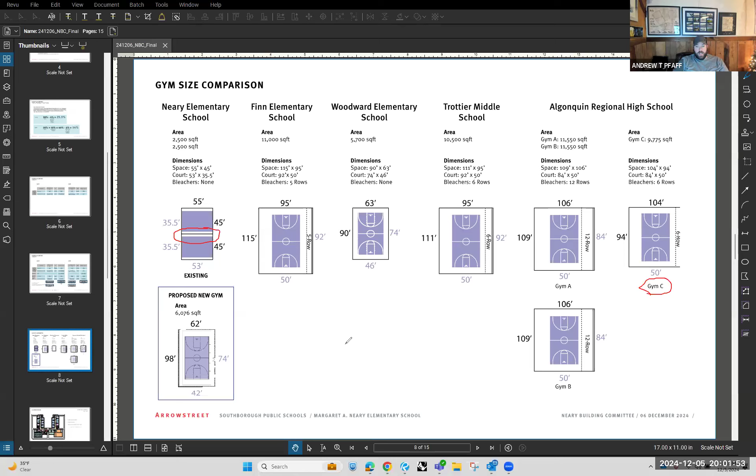But I think we should run that analysis if we can. Okay. Anything else on the gym, Arrowstreet? No, I think we're all set on that.

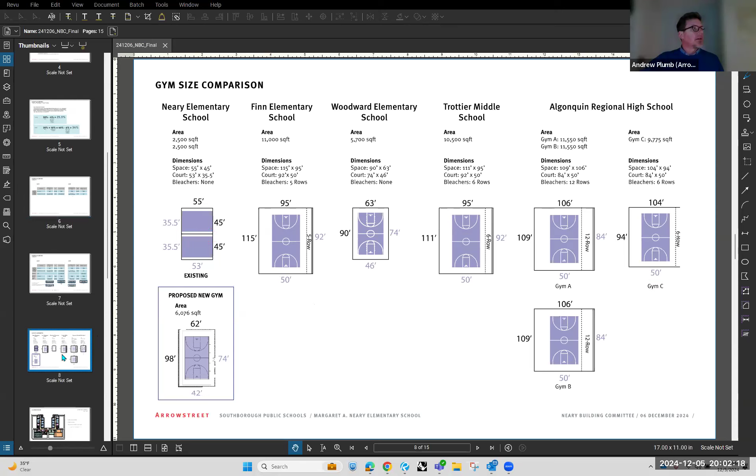All right, let's move to design review then. Great, okay.

So what I'll walk you guys through next is some incremental updates to the plans that we've been doing. As you know, this has been an ongoing process on a 2-week cycle with Greg and some of his staff and educators in the schools. This has been a very productive process. We've also got some feedback about the layout of the Learning Commons, which I'll take you through. There seems to be a consensus solidifying around a direction that we want to make this group aware of, so that you're looped into the current state of the design.

So what we've got here is the first floor plan, and we've been continuing to dig in and develop the specifics of the classroom size, how one enters the classrooms, how the classrooms relate to the small group rooms, whether classrooms have adjoining doors between them, and in conjunction with that, we've been discussing how the Learning Commons relates to those classrooms. I've got another slide coming up that goes into more detail on that.

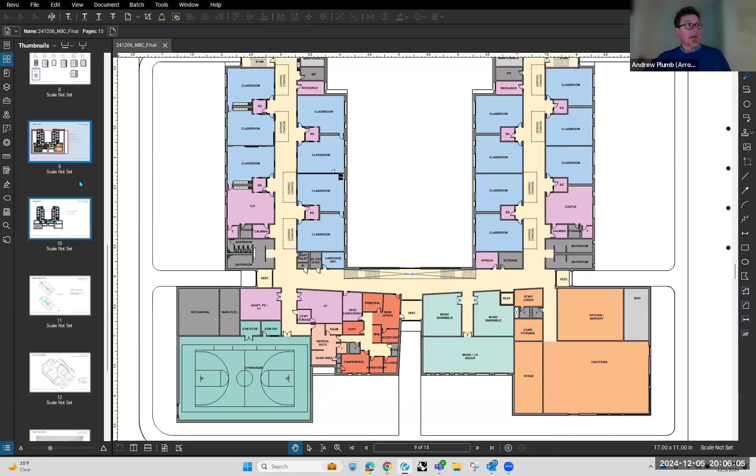Before I go into the Learning Commons and more detail about the classroom layouts, are there any big picture questions about the floor plans?

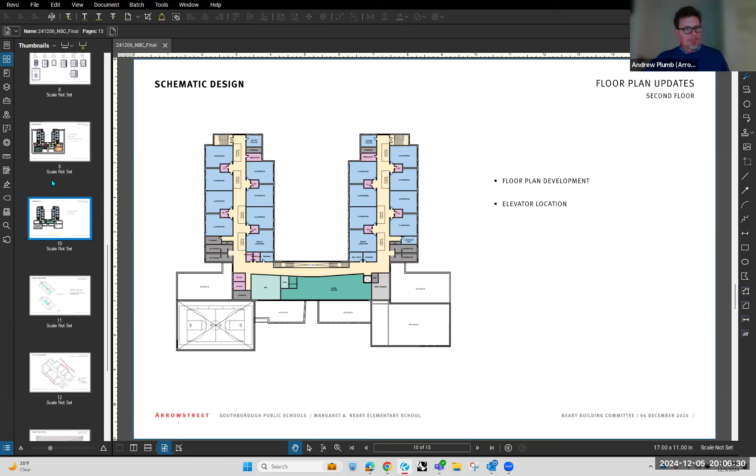Okay, so I'll go here to this slide. I think in the last NBC meeting we took you through the fact that we were looking at these two models of how the Learning Commons might be set up in the building - the continuous width approach, which is here on the top, or the centered approach. We'd done a bunch of studies looking at interior perspectives and how things relate to the classrooms. And then Greg and his team put together a survey that they sent around, and we highlighted a couple of bullets from the feedback.

So that was 77% of respondents, of which there were many, preferred the continuous width layout of the Learning Commons over the centered approach. And it was kind of evenly split, but slightly in favor of placing the cubbies in the Learning Commons as opposed to within the classrooms. From that feedback and our subsequent conversations with the working group, we are intending to continue with this direction of the continuous width Learning Commons in SD. It seems to be checking all the boxes and meeting the needs they've got for how they want to use and can imagine using the space.

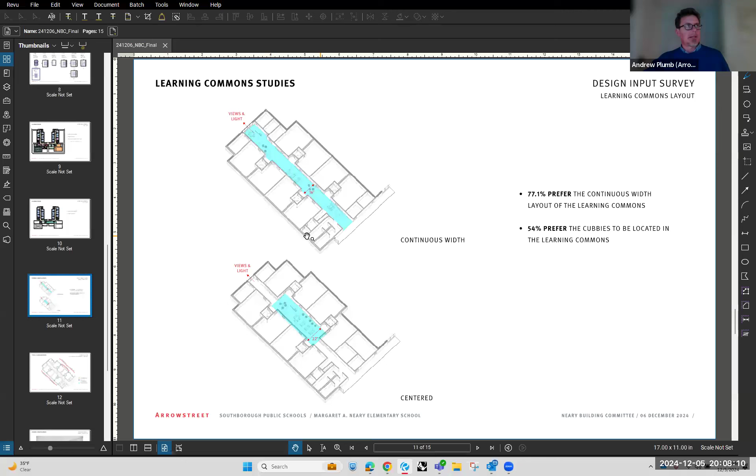I'm going to zoom in now. This is a larger version of that plan on the top that we just saw. We were really digging into how does one enter the classroom? How does one enter the small group room? Do you have access from the classroom to the small group room? Are the classrooms connected to each other?

I'm not going to take you through all the minutia we went through with the working group, but we were looking at issues of access versus security, because the more accessible and flexible things might be, there's a flip side to that, where it might be more involved to secure in a lockdown situation. So we looked at several different ways of thinking about it. What you're seeing here is the conclusion of that process, where it feels like this is offering what the educators and administrators have said would work well for them.

So to walk you through how this works, I'll get my pencil out again. There's essentially, off of the Learning Commons, these areas which are sort of like a front door, if you will, to a pair of classrooms and a small group room.

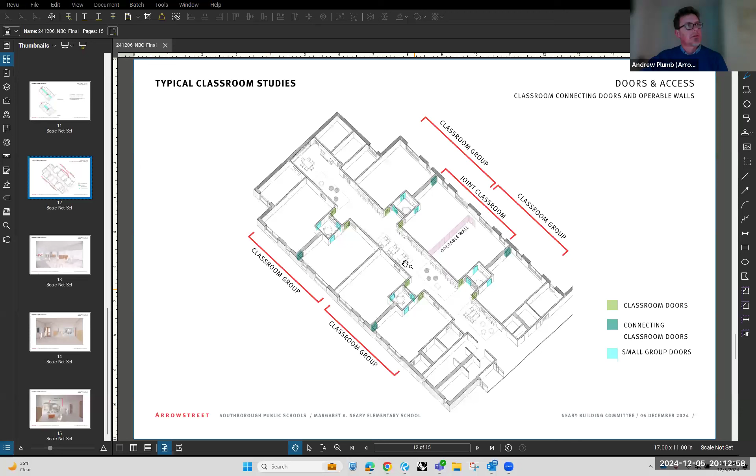And just as a reminder of what this kind of learning commons space is, I'm going to reshare a couple of views that I think we looked at once before with this group. Here you can see the idea that there are clusters of different types of furnishing.

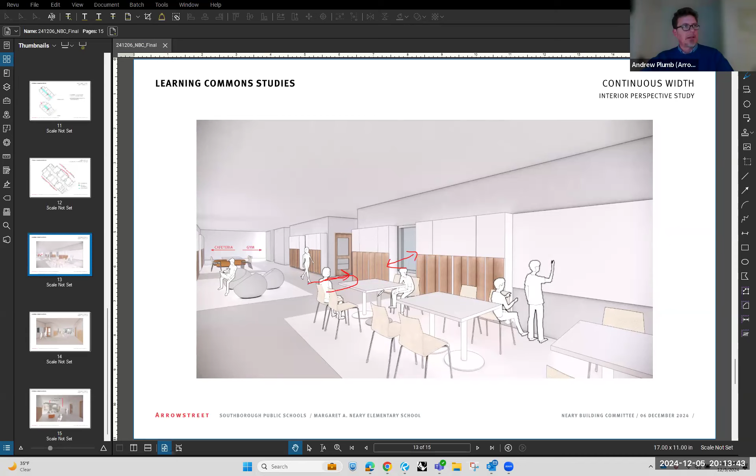This is one of those recesses I was talking about where you can enter into 2 classrooms or the small group room. There will be a series of interior windows that allows a teacher in the classroom who may have sent students out to be able to peek out and see what's going on, so they're still able to have that line of sight to the students.

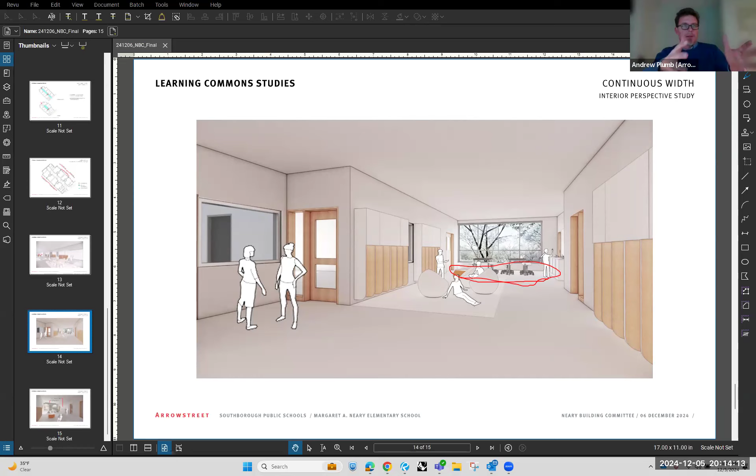Looking in the other direction, other feedback we received was that we've been identifying at the end here with some large windows to bring in light and views to the landscape. This is the STEM desk area, and previously we had shown base cabinets and counter in the space, and they requested we move it against the wall, which would make it more flexible. So we're now showing that with 2 sinks against the wall and a potential whiteboard tack surface for lessons.

Potentially there could be additional upper storage if needed, that's something we're still discussing. Potentially there's a recessed screen in the ceiling that can drop down with a ceiling mounted projector for large presentations. But one of the modes of use that has been talked about is the full grade meeting, and this would allow the students to stack in the space and look down and see whatever the lesson is or whatever's being presented.

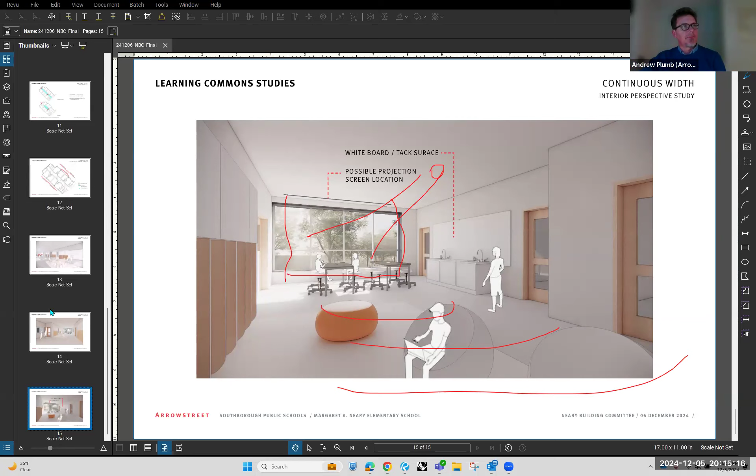So it feels like all of this is gelling fairly well, and that's sort of where we're at with our update.

Questions from the committee?

All right, I'm seeing none. So, great, thank you too.

Go ahead, Kathy. Can you remind me who is on the working group? The only member of our committee that sits in, as she's available, is Denise, but I'll let Greg speak to the educators involved. Sure, we have a couple of principals sitting in, and then we have a special educator, Lisa Goulet, a PE teacher, Allison Stevens, and a music educator, Lise Bignice. We also have David Finneran, who's association president and also a 4th grade teacher in Neary. So those are the members.

Which principals? Kathleen Valente and Steve Mucci. Okay, all right, thank you. And actually Clayton's been at some of them as well.

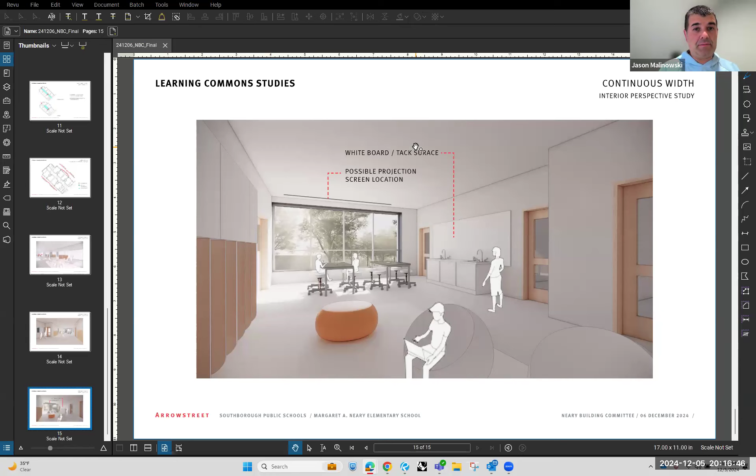All right, any final words for Skanska or Arrowstreet? No, all set. All right.

Go ahead, Roger. So all 3 elementary principals are at least represented in that working group? Is that what you said? Yes, I wasn't sure if people could hear me. Can people hear me? Yes, we can. Thank you.

Thanks for that, Greg. Kathy, is your hand still up, or is that another question? Go ahead. Is Kate still here? I don't see her anymore. Do you want to ask your question and have Arrowstreet come back with an answer at a later point? She stepped out to get her son in bed, so I can ping her again if you want, Kathy.